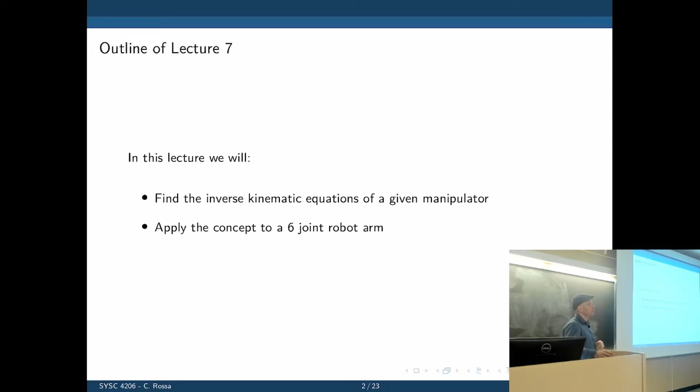So today you're going to expand what you saw in the last lecture and try to use that to solve the inverse kinematics of a 6 DOF robot arm, such as the Mecademic that you use in the labs.

So just a quick review from the last lecture. We did the forward kinematics. That is easy because there is only a single solution to that. We give all the DH parameters, we calculate all the transformation matrices, we input the variables we can control, and the output here is 2 vectors - well, 1 vector and 1 matrix. 1 vector that gives the position of the end effector, and the other one that gives the orientation of the end effector. Combined, we create the homogeneous transformation, and in the homogeneous transformation we can get analytical expressions that give the position and orientation of the tool tip.

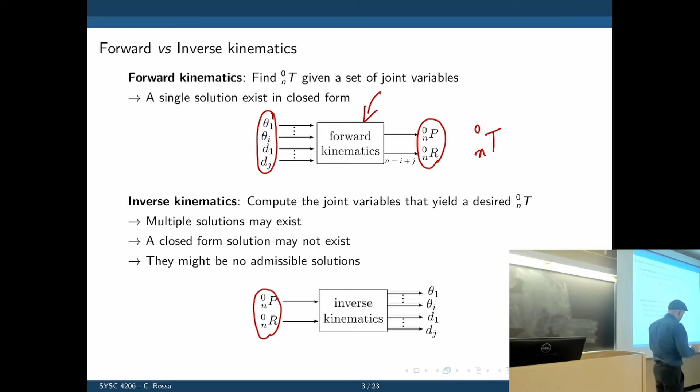The inverse kinematics is a bit more complicated because now we specify a desired position and orientation, and our job is to find the inverse procedure that now outputs all the actuation variables. In other words, given a desired position and orientation, where should we put each joint, each prismatic or revolute joint? If you consider the Mecademic robot arm, this is what we tell the robot when we want it to go to a given position. We are telling it to go to a Cartesian position in a given orientation. So mathematically, what we say is we are specifying the desired homogeneous transformation from the tooltip to the base of the robot. And then you have to find the joint angles 1 to 6.

So we have a total of, remember, they have a 4x4 matrix. The last line is constant. So we have the remaining 12 cells in the matrix that are equations that are now dependent on theta 1 to theta 6. So we have 12 equations, 3 positions, 9 orientations - right, those are the components of the rotation matrix. Out of those, only 3 are independent. So you have 3 rotations, 3 positions. So I have 6 independent equations that I have to use to solve for 6 variables. So that is not a very trivial task.

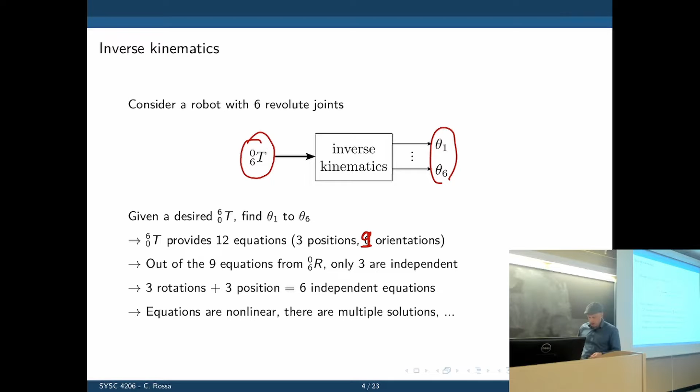We solved this one in the last lecture. We're going to use this one again. That's why it's here - this is a 3-link robot arm. And how did we do this? We specify the position of the tooltip by saying that we want the robot to go to position px, py at an angle phi.

Given that and given the length of the robot, we could move back to this point here by using a simple trigonometric relation. Now instead of dealing with the tip of the robot, we are dealing with the end of joint frame 2, with frame 2, or the end of link 2.

If you do the forward kinematics using the DH parameters, we have that giant matrix. So where is the Cartesian position here? So those are these 3 points. First one is px, second one is py at the tooltip. And you can see that they are functions of the preceding joints.

So here we have now, all we have to do is take these 2 equations and somehow solve for theta 1, 2, and 3. So here's our 2 equations, and here's the third one that I get from the specification of the orientation angle phi.

Okay, so what was the approach again? To start from the tip and see if we can simplify the degrees of freedom by moving back using simple trigonometric equations and then solving for the remaining variables. Right? So that's the way we did that.

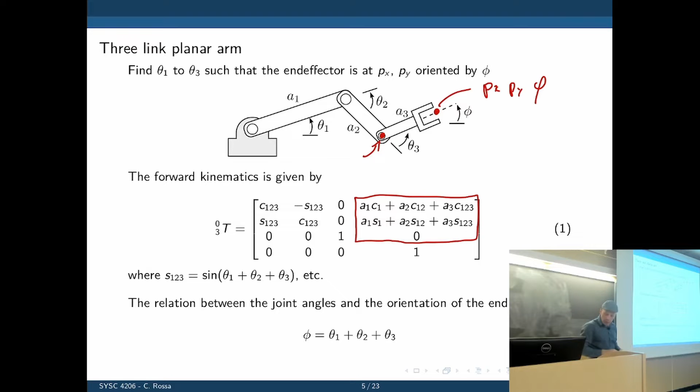We found theta 1 and theta 2 using some mathematical manipulations. Those are the equations we came up with in the last lecture, and that relation is how we find the last angle based on the desired orientation in the other 2. Okay, so that's what we did in lecture 6 for a 3-DOF arm.

Now let's see if we can use the same approach in a 6-DOF robot arm, using now not a planar arm, but an arm that can move in 3 dimensions.

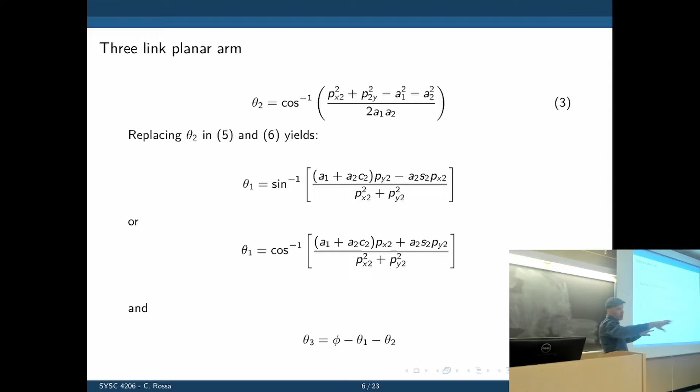So this is what we're going to consider: a 6-DOF robot arm having a spherical wrist. A spherical wrist is simply a combination of 3 joints, and the actuation axes of those 3 joints will intersect at a common point.

So here we have the last 3 joints. If we draw the actuation axis for each of them, this is one, that's another one, and that's a third one. The point here where they intersect, you're going to call that the wrist of the robot arm.

Right, so I have 3 consecutive joints that intersect at a given point. That's a spherical joint. And that position there is the wrist position.

You can see here in these 2 examples, we have a spherical joint at the tip. That one is around here. The Mecademic has one as well. If you look at the 3 end joints, they will intersect at a common point.

So you have that last joint that rotates, and you have one like this, right? The spherical, the wrist is just behind that axis, and is the point where these 3 consecutive axes intersect.

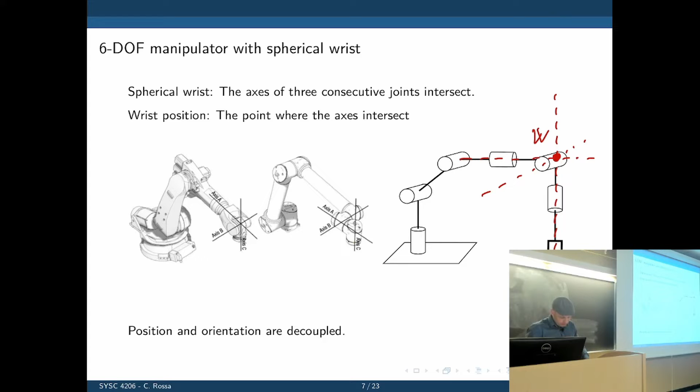Does that make sense so far? Okay, so our problem is: given a desired homogeneous transformation from the tooltip to the base, in other words, given a desired Cartesian position for the tooltip and an orientation of the tool or end effector, find theta 1 to theta 6 that will give us that homogeneous transformation, which is a function of theta 1 to theta 6.

First assumption I'm going to use is what we just said: the wrist position depends on the first three joints. Second is the wrist orientation depends on the last three joints.

So if we want to find that point, we can now split the problem into two: find the homogeneous transformation that will position the wrist here, and find the orientation of the wrist axis that will point down. So we are splitting the problem into two, into a Cartesian requirement of placing the wrist there, and then using the rotation matrix we could find the orientation of the wrist.

So in other words, this is what we are looking for now: the position of the wrist and its orientation. What is the orientation of the wrist? Well, it is given by the homogeneous transformation that connects the tip of the robot to the wrist point. That is homogeneous transformation 6, the tip, to joint 3, which is where they intersect.

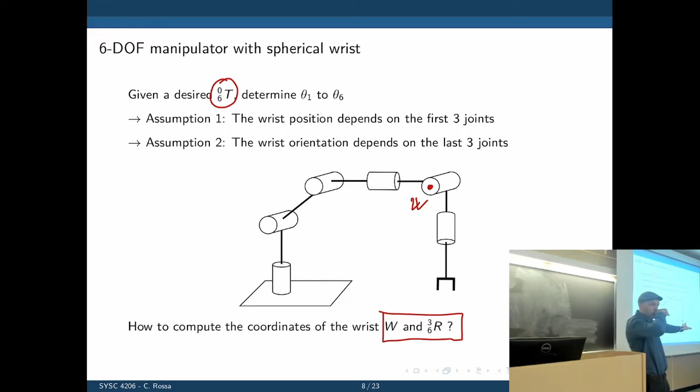But it turns out that this point is not 0. This point is the third link. So instead of going from 6 to 0, we go from 6 to 3. That's the homogeneous transformation that now specifies the position and orientation of the wrist. From that, we take the first 9 elements, which are the rotation matrix. Sorry, that's what I wasn't showing there.

Okay, so here we go. First things first, let's try to find that point. What do we know? What we know is T0, 6 to 0. Why do we know that? How do we know that? That's the desired position and orientation.

So look at that as a numerical matrix. There's no variables in there, just numbers specifying the Cartesian position and the orientation of the tool. So that is known, right? If we know that, we also know the orientation of all axes of frame 6 that is connected at the tooltip, because we know the entire rotation matrix.

We know exactly how the 3 axes of the tooltip are oriented in space. Correct? Does that make sense? Because you're telling the robot, go like that, go with the tip like this and that, blah blah. That's specified in the rotation matrix. So we know that, and we know the position of the frame at the tip of the robot.

Our last actuation axis there is Z6, and it points down because it is going along the last actuation axis. So if we know this point over here, one second, if we know this point here, what is the relation between the blue and the red point? The red point is the blue point shifted in the negative z axis by d6. Shifted in the negative z axis by d6. Does that make sense? Right?

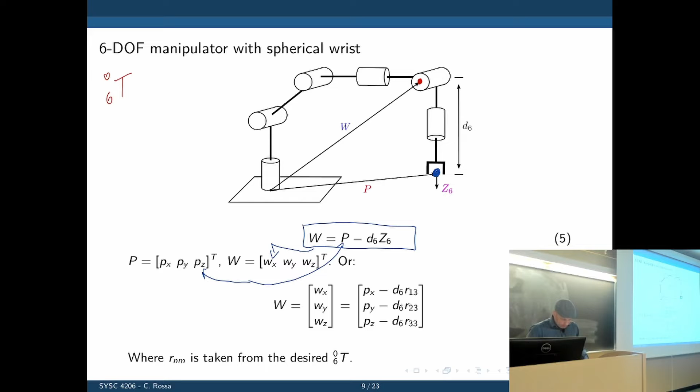So, if this is theta 1, theta 2, theta 3, we can tell that the position of the wrist does not depend on theta 4, 5, or 6. Right? So our job is to find the position of the wrist W using theta 1, 2, and 3, and then find the orientation of the wrist that only depends on 4, 5, and 6 through the transformation, the rotation matrix that connects the end effector back to the wrist.

And how do we do that? Easy. Because once we determine the position of the wrist in space, we'll have theta 1, 2, and 3. If we have theta 1, 2, and 3, we will know the rotation matrix from the wrist to the base. Correct? We'll have W. And if you have W, then we know the orientation of the wrist back to its base. So we know W, we know R3 to 0.

What else do we know? We know the desired orientation of the tooltip with respect to the base. That's the input, that's what you want to solve for. We are looking for... we know this one as well because you now solved for theta 1, 2, and 3. What goes here is 6 to 3. Does that equation make sense?

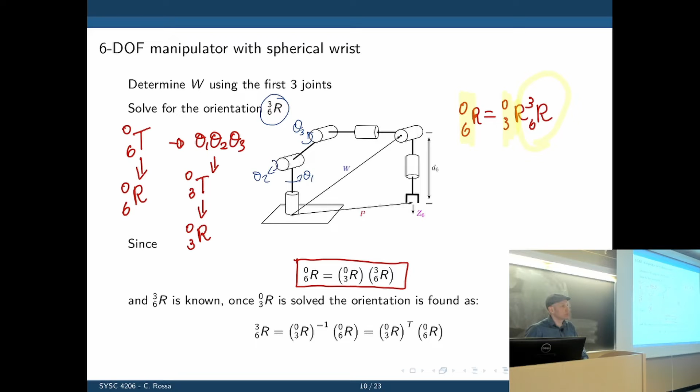Any questions? No? All right, so let's do that.

We know how to go to W from the end effector. Using the projections, we go from the tip back to the wrist point W. So we can forget about the other three joints for now and just consider the first three.

The input here to this problem, what we know is Wx, Wy, Wz. I can place that in space and calculate the projection on the base frame here. This is the projection on Y, this is the projection on X. What is the height? The height is the z component of the wrist position.

From that, we can calculate theta 1, because if you look at the position down here, the projection down here, this point is directly affected by theta 1. So how do we find theta 1?

Trigonometrically. What do we know again? We know w, x, y, and z. So we know this projection, we know that projection. What is theta 1? It's the inverse tangent of y over x, exactly wy over wx. This and that. Does that make sense? Very good.

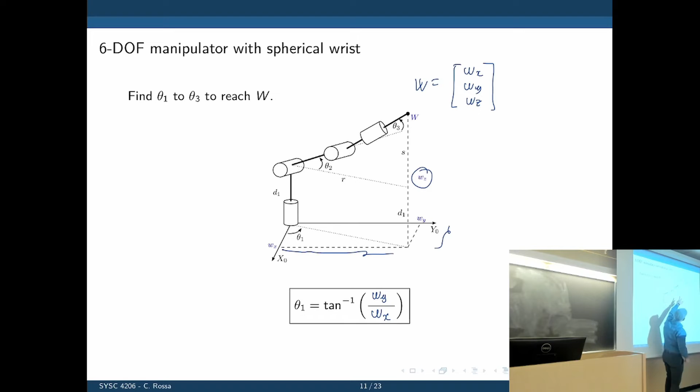Would be R, yeah, R and S. Right? Because now this becomes a 2D problem. If we forget about that, the robot is in that orientation given by theta 1, so this plane rotates at theta 1, and in this plane there is a two-arm mechanism operating. The desired position of the tooltip now, which is W, is R and S within that plane. Does that make sense?

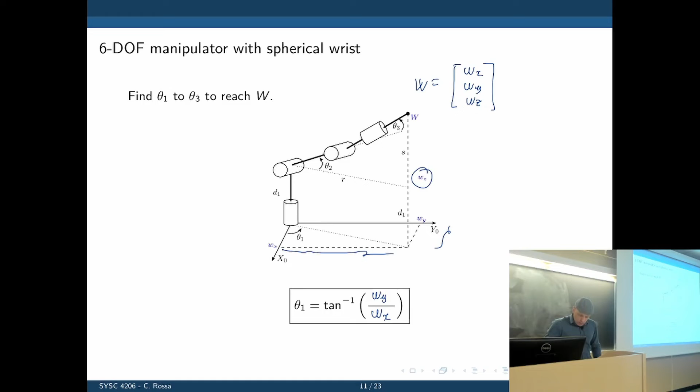So if you determine R and S, then you can use the exact same equations we solved in the last lecture to find theta 1, theta 2, and theta 3. What is R? R is this distance over here. We know this distance and that, so R is the square root of wx squared plus wy squared.

Alright, so here is another view, taken from this point, from this plane. So the position of the tip is R and S. What is S? How do you calculate S? WZ, sorry. It's adjacent: WZ minus D1. D1 is fixed, right? This height here is a characteristic of the robot itself.

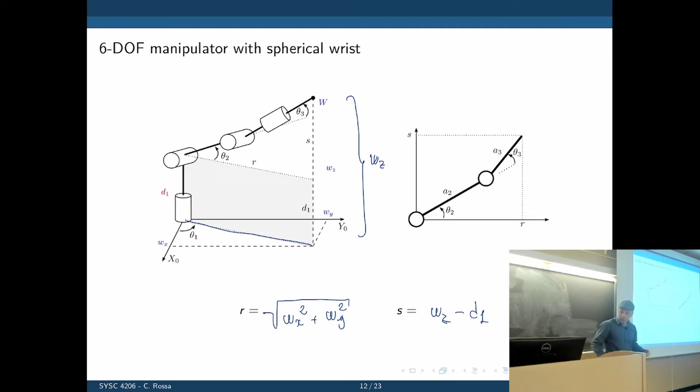Now what do we do with this? We are specifying the desired position of this two-link arm in that plane that rotates about Z, like this, translated by theta 1. Is this clear? We know all these values. When you know all that, it comes from the operation we did before. We can now find theta 2 and theta 3 using the very same equations we had before. The only difference is that now, instead of x and y, we have R and S. So you have this extra manipulation to do. Does that make sense?

Yeah? Okay. Are you sure? It's a lot. It's a lot to take in.

I'm not so sure that this is clear, because I've probably taught over 400 lectures in the last 4 or 5 years. I can tell when students are following or when they're not, when they pretend.

Okay, can we move on? What is our next job now? We found the Cartesian position of the wrist. The last part is to find its orientation. Notice that the position of the wrist only depends on theta 1, 2, and 3. The orientation of the wrist, on the other hand, only depends on theta 4, 5, and 6.

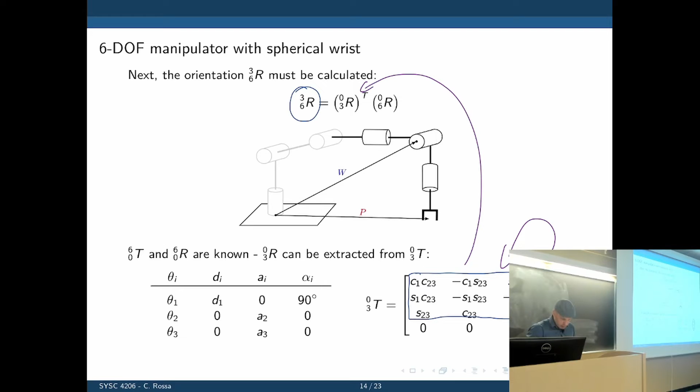How do we find R6 to 3 first? R6 to 3 is a function of theta 4, 5, and 6, whereas the rest are just numerical, known values. So our only variable is that entire transformation matrix.

We have a spherical wrist, so we can now take the DH parameters of the spherical wrist. That L1 here should change—this is actually D6. So those are the DH parameters of the spherical wrist.

We can multiply the 3 homogeneous transformations, and then we have the homogeneous transformation from 6 to 3. Right? Does that make sense?

From this homogeneous transformation, there are functions of the unknown values theta 4, 5, and 6. We take the transformation matrix 6 to 3—the rotation matrix, excuse me—that's there.

Should that T be 6 to 3, not 3 to 6? Which T? In the same way? Sorry, which one? In the text, up there? No, that's right. Okay, that's right. Yeah, oh yes, it's flipped—it's 6 down, 3 up. Yeah.

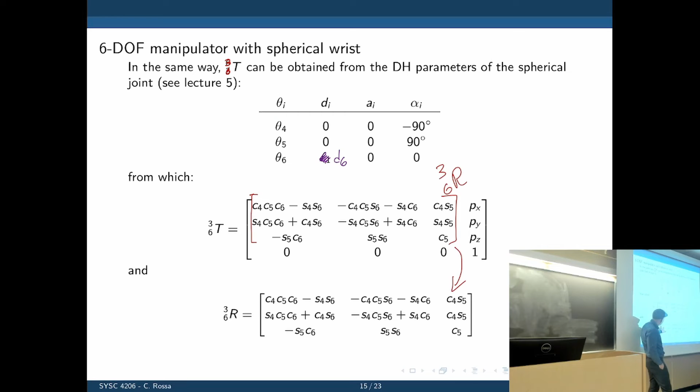Okay. So you see that now this matrix has 9 equations, all functions of theta 4, 5, and 6. How do we solve for it? Easy.

There you go. Let's recap what we did here one more time. This is the rotation matrix from the wrist to the end effector that we calculated using the DH parameters of a wrist joint. This is the transposed rotation matrix from 3 to 0 that we know, because we already solved for theta 1, 2, and 3.

This is known because these R1s come from where? From the original specification of desired orientation of the tooltip. So all we have to do is solve and expand these nine expressions. Now we have a lot more equations to solve for, but remember that only 3 of these are independent, so you can find these independent equations and try to solve for that.

So let's transpose this matrix. What goes in the first line there if you transpose it? These two will shift, so you have sine 1 cosine 2,3. These also shift, so you have sine 2,3, minus cosine sine 2,3, cosine 2,3, minus cosine 1 and sine 1.

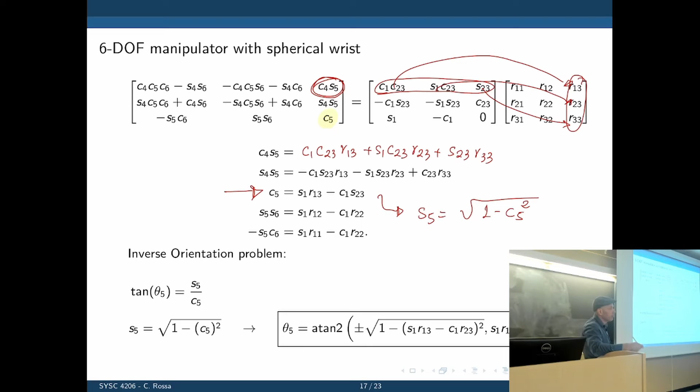We can define the tangent of 5 as that, the sine is taken from this when you replace cosine in there. Cosine is already given here. Now we can use the atan2 function to keep track of the quadrants.

Will we get a question like this on the midterm? Oh, for sure. Yeah.

So how do you get S5? 1 minus cosine squared. We have sine of 5 squared plus cosine of 5 squared equals 1. So sine of 5 squared equals 1 minus cosine 5 squared, square root of both sides.

I'm not going to ask you the inverse kinematic equation. It's the tangent, no, this one from here, right? Now the tangent is sine over cosine. Okay, yeah.

So I'm artificially fabricating the sine so we can use the atan2 function to keep track of the quadrants.

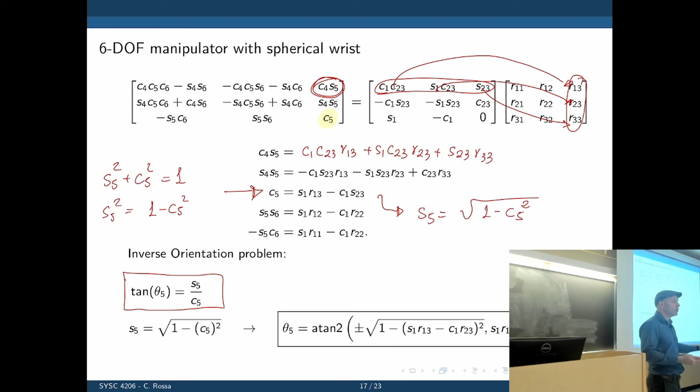Well, let's keep going. How can we find theta 4 now using the tan function? Easy, let's divide the sine. Let's divide this too. So if we divide, how do we do this?

We divide this by that. We have cosine, we have sine 4 sine 5 divided by cosine 4 sine 5. These two cancel out. We have sine 4 divided by cosine 4, which is tangent of 4.

We have expressions for both sine and cosine now. We don't need to create that artificially. So if we just divide this by that, it's the tangent of 4. Does that make sense? Notice once again that in all these expressions, everything is known. We already calculated everything.

And that's the beautiful expression for theta 4. There are other ways, of course, to calculate it. And what is theta 6?

We'll do the same, but now we divide these two. When you divide these two, we have S5 canceling out. We are left with this negative 1 here. So this is the tangent of a negative theta 6. Invert that, theta 6 is there.

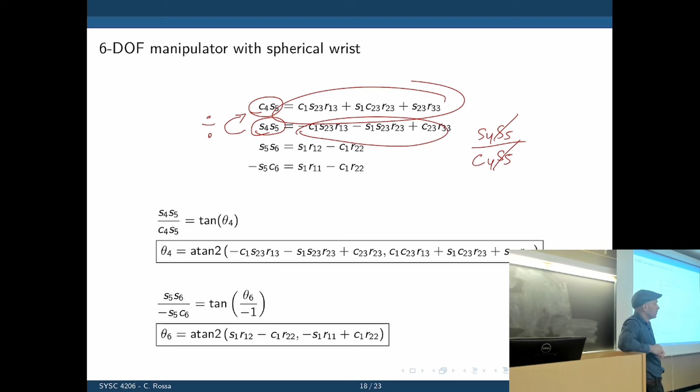And then we have it. We have now theta 1, theta 2, 3, 4, 5, and 6. Isn't that nice? No, it is. It's an interesting problem. It's a very clever way, I think, to split that into two parts.

So we could only do that again because we met two criteria. The first three links were parallel in series. The last three were spherical. They met their actuation axis passed through a single point.

So here's the summary of all we did: theta 1, 2, 3, 4, 5, and 6, with the intermediate step here to calculate R and S. There's one thing missing, which is to determine Wx and Wy. Remember from that expression we saw where we project the end effector along Z6. That one is required to do that.

And that's it. So there's a little problem with all this: for a given Cartesian position, there are 8 possible solutions. How do we know which solution to pick? How do we know if the robot can do it? We have to check them one by one. In the inverse kinematics already implemented in the robot, it will check which solution to go to.

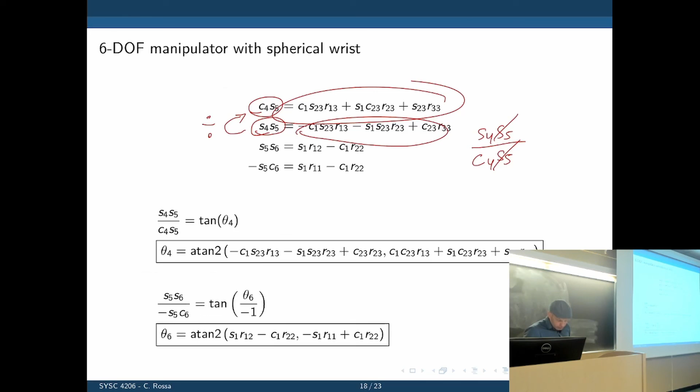So here the P point is the point of the wrist, right? P point is the position of the end effector. One second, P goes here. W is there. Then S equals to PZ, or the W then? PS, the third row, S equals to PZ? Yes, or is it W? This is W. Yes, this is W.

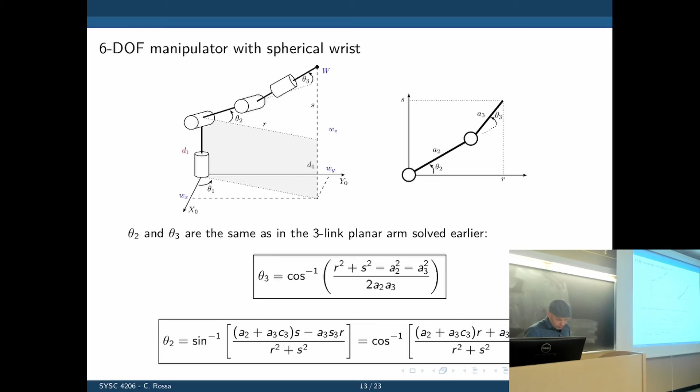There's a typo here. All right, that's what we did over here. It was W indeed. Good catch. No, that was WZ. Yes, WZ. WZ. Yeah, exactly. Okay.

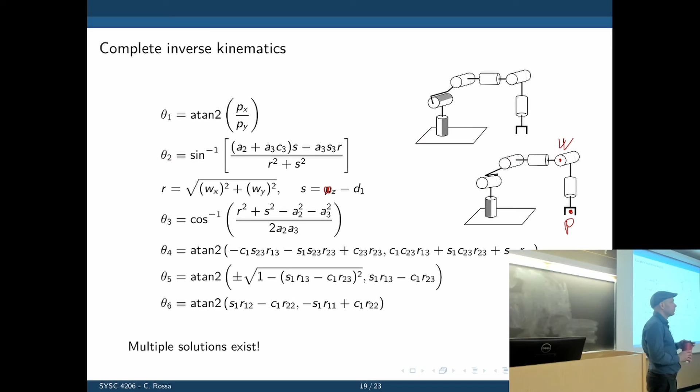Now let's do an exercise here, see if we can make sense of all this. So here I have a different robot. I replaced two of the joints with prismatic joints, and left the rest, just moved stuff around.

Do we have a spherical joint? First question, do we have a spherical joint, and where is it? Joints 4, 5, and 6 - do 4, 5, and 6 make up a spherical joint?

So I'll do the actuation axis for the first one. Here, theta 4. Theta 5, up and down. So far so good, they intersect. What about the last one? It's also like that, it can rotate like this, right? Coming out of the page, it rotates around that. So the axis can travel like this, this sixth axis, and if it does that, it still passes through the same point. So there is indeed a spherical joint, and the wrist position is right here.

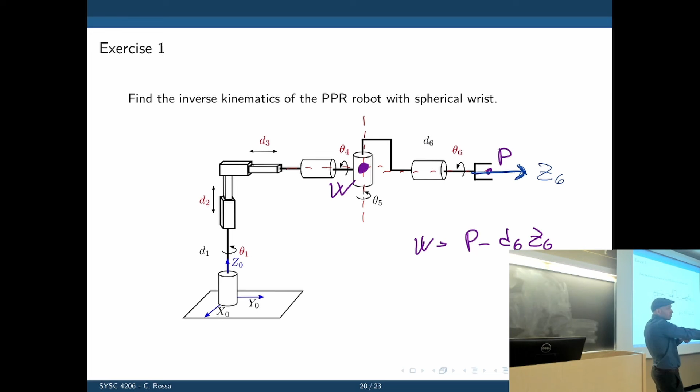Going back to the last one, why is it Z6 though? In the other one, we were working with the negative side. Well, it happened, yes, but remember that the z-axis is always oriented along the actuation axis. So z6 is here - that's just because of the axis right here. Yes, but it's not pointing down. It's pointing along the actuation axis of the last joint, right? Which in the previous case happened to be down.

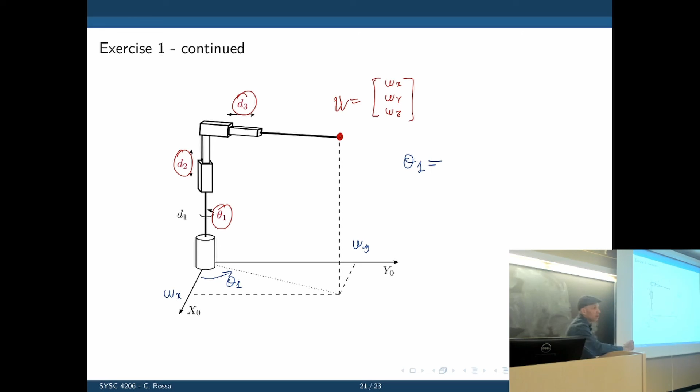All right, so this is what we know. How do we find theta 1, 2, and 3? Theta 1, let's put it over here. The projection down here is wy, wx. What is theta 1? Is the inverse tangent of wy over wx. Done, first variable, done.

What is d3? Square root of wx squared plus wy squared. We know all these, so d3 can now be calculated as a function of that. The only one left is d2. We can find d2 by realizing that this is wz. What is wz? It's d1 plus d2. d1 is fixed, d2 is the actuation. So d2 is wz minus d1. So here they are.

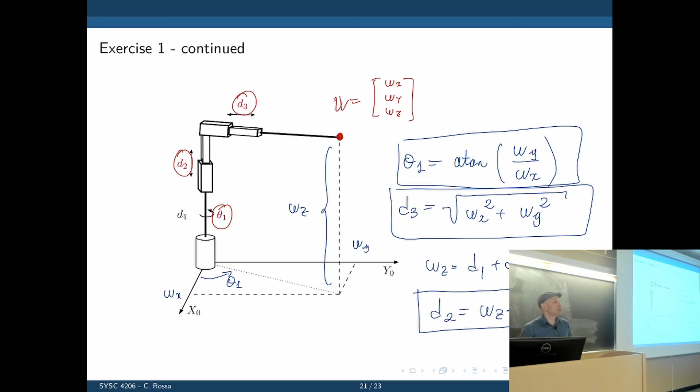Everything else is identical to the previous example.